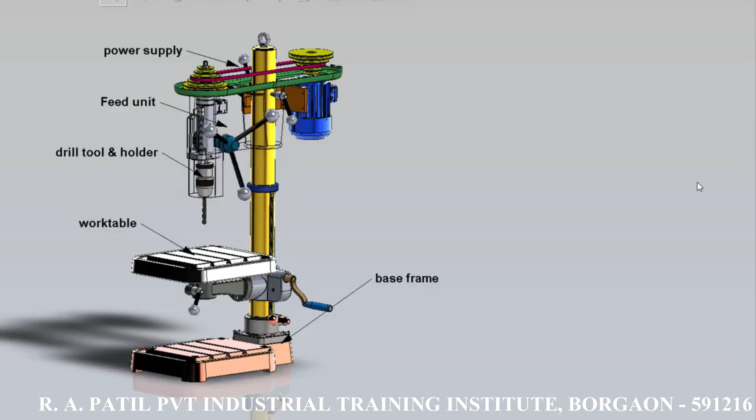In this video, we will see about drilling machine, the construction and working of drilling machines.

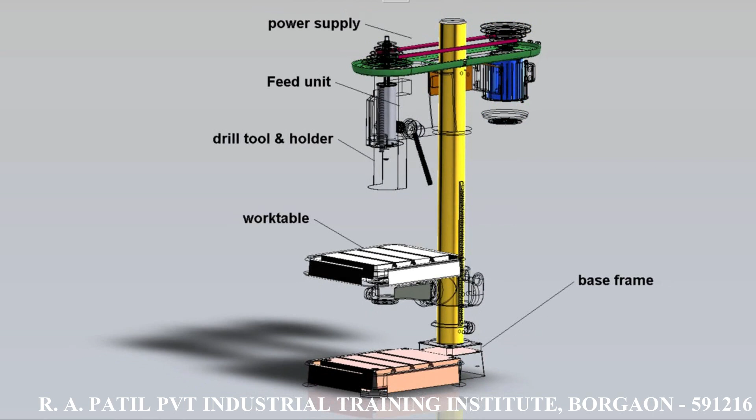Drilling is an operation of making a circular hole by removing a volume of metal from the job by a cutting tool called a drill. A drill is a rotary cutting tool with one or more cutting edges and usually one or more flutes for the passage of chips and the admission of cutting fluid.

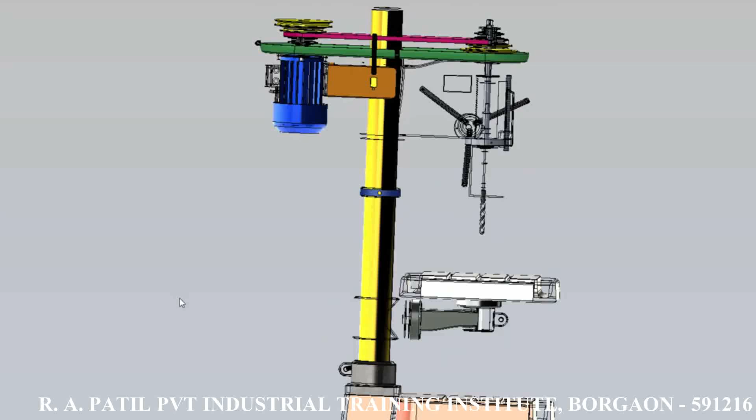A drilling machine is a machine tool designed for drilling holes in metals. It is one of the most important and versatile machine tools in a workshop. Besides drilling round holes, many operations can be performed on drilling machines such as counter boring, counter sinking, honing, reaming, lapping, sanding, etc.

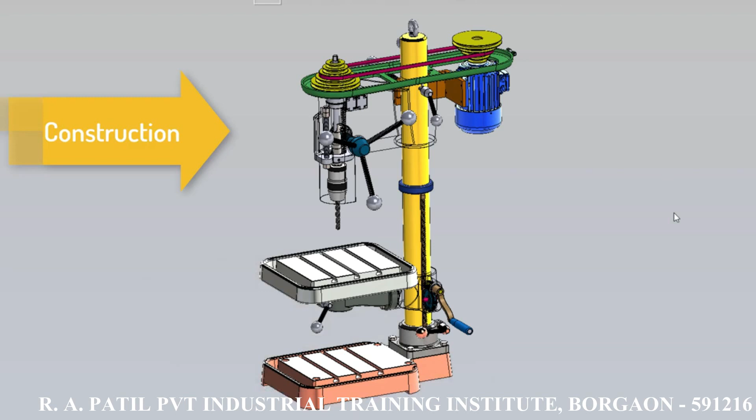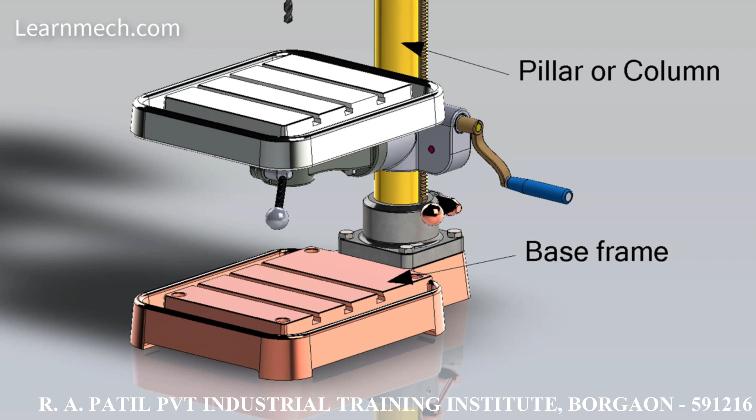Let's see the construction of the machine and what are the parts required for making this machine. Base frame is a heavy casting and it supports the whole assembly. Column is a vertical round or box section which rests on the base and supports the head and the table. The round column may have rack teeth cut on it so that the table can be raised or lowered depending upon the workpiece requirement.

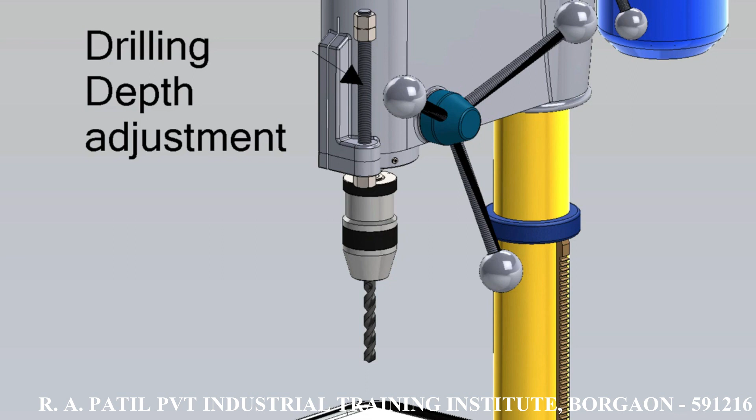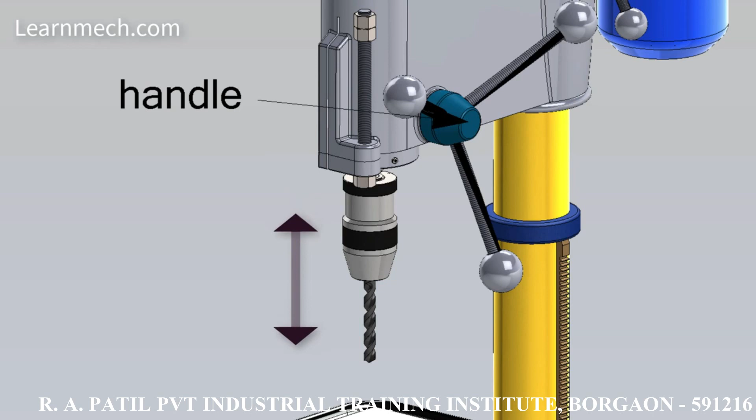This nut and bolt is used for fixing the height for mass production. This handle gives feed to the drill. The feed is along the axis of the drill, that is up and down. Drill bit and drill chuck are held at the end of the spindle.

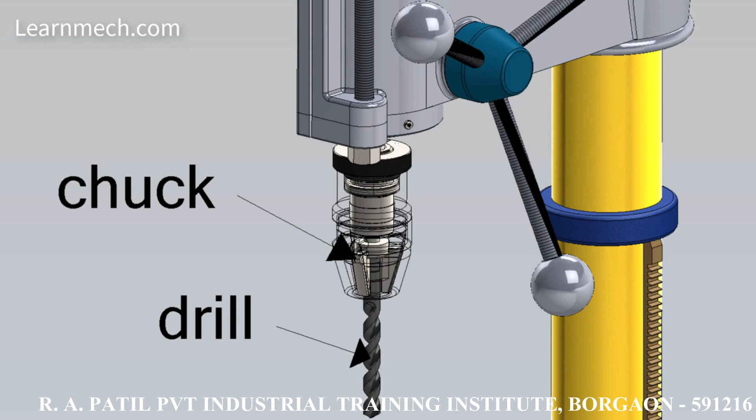Spindle is made up of alloy steel. It rotates as well as moves up and down in a sleeve. One end of the spindle is connected with the pulleys and the other is connected with the chuck.

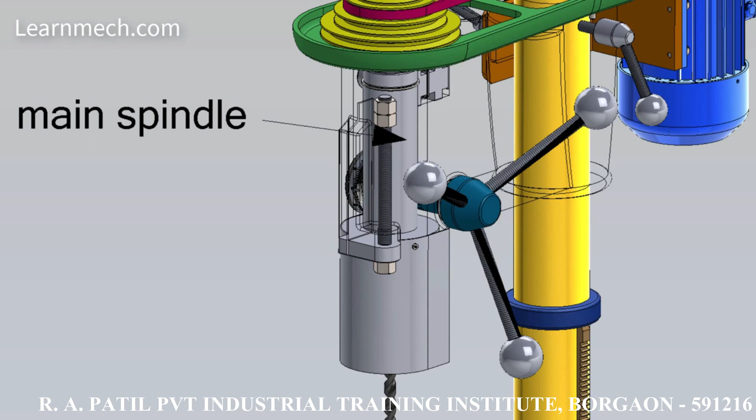A pinion engages a rack fixed on a sleeve to provide vertical up and down motion of the spindle and hence the drill, so that the same can be fed into a workpiece or withdrawn from it while drilling. When we rotate this handle, because of the pinion and rack mechanism, the sleeve moves up and down.

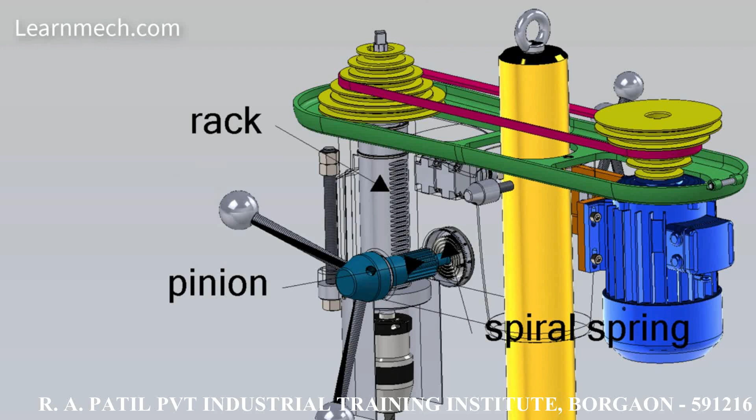Basically, one end of the pinion shaft is connected with the spiral spring so that the vertical height can be measured or controlled. In a drilling machine, the drill is rotated and fed along its axis of rotation in the stationary workpiece. The workpiece is held on the table and it remains stationary.

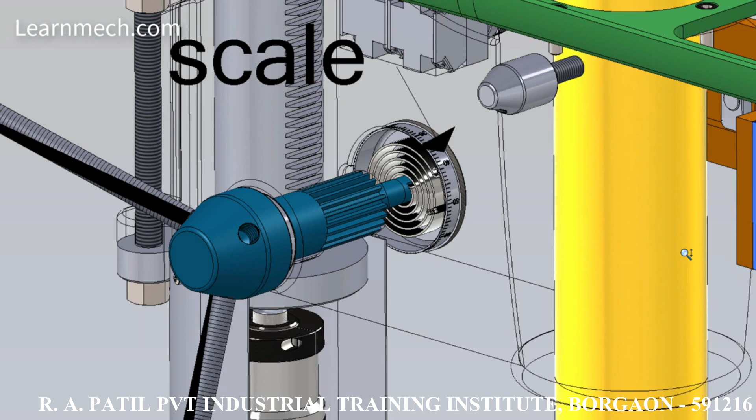The head contains the electric motor, V-pulleys and V-belt which transmit rotary motion to the drill spindle at a number of spindle speeds. Spindle speed or the drill speed is changed with the help of V-belt and V-step pulleys. Larger drilling machines have a gearbox for the same purpose.

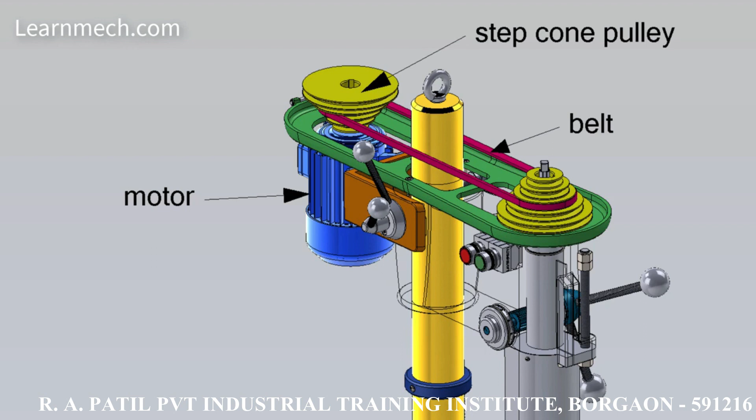Let's see the working of the drilling machine. I have already mentioned that when we rotate the handle, it will move the drill bit along its axis of rotation, that is upward and downward. The rotary motion of the motor is transmitted to the spindle by using V-belt and V-pulleys. Vertical feed is applied using the handle.